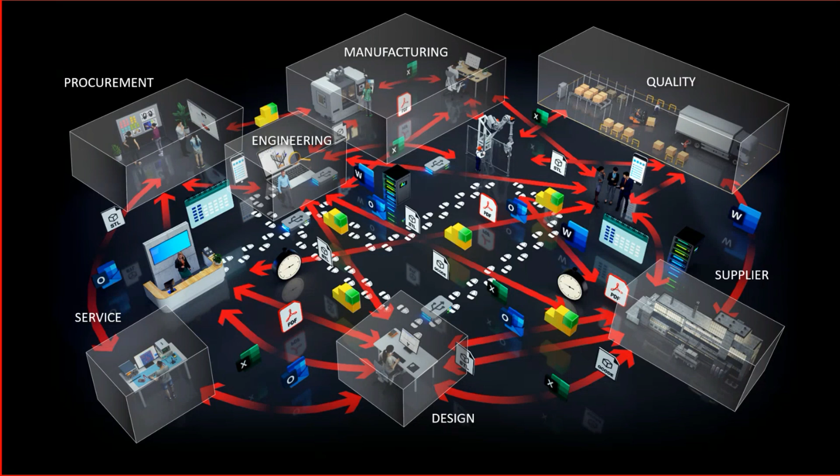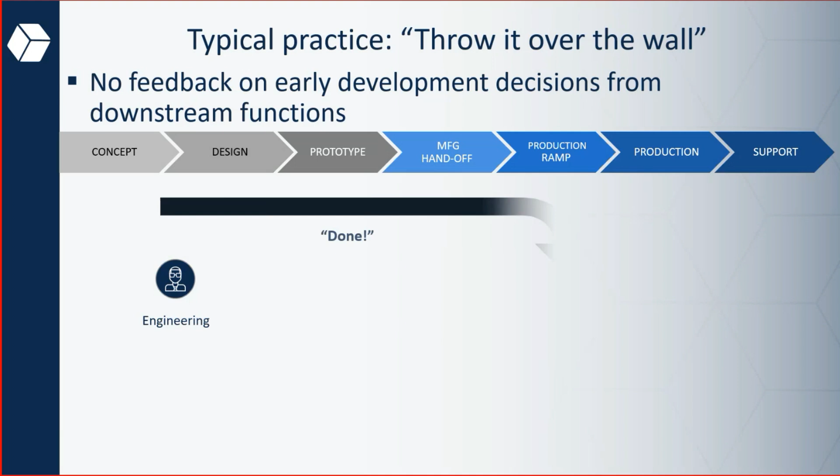Most of us will also resonate with the typical practice of throw it over the wall. We do what we need to do. A job comes into the in-tray, you do your job, throw it over the wall to the next person - not my problem anymore, right? That is one of the major reasons why a lot of inefficiencies take place.

So engineering does their job, throws it over the wall to supply chain, manufacturing, quality, and service. Then each one of them has to make a decision based on the information received from engineering. Now if there's no reverse flow of information from those 4 departments back to the design or engineering team, we don't understand from a design perspective what they need to do to mitigate potential issues.

And again, the information goes out, the work gets done, then they realize, oh wait, we've got a problem. They send the information back, and there's another delay to do the redesign. That becomes a very cyclic and, for want of a better word, annoying and irritating process, which leads to a high life cycle change cost.

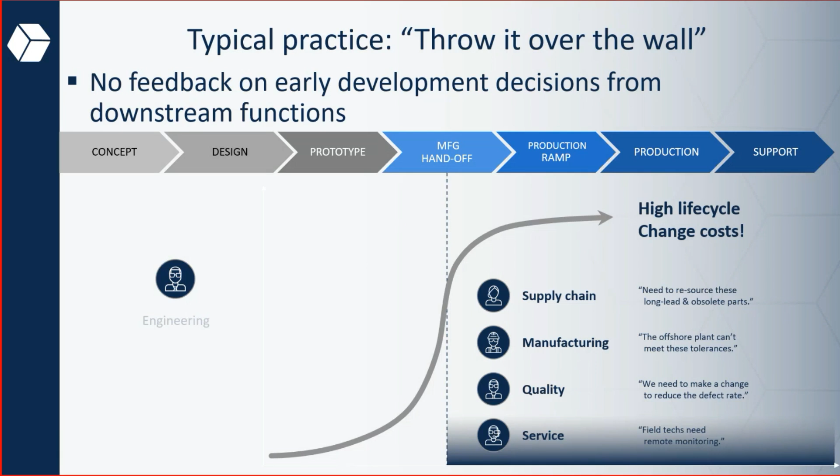But also, we spoke about missing your deadline - this is one of the areas. One of the reasons for that back and forth can also be one of the major reasons why deadlines are missed, and we all can resonate with that.

And all of this leads to more pressure than ever. The pace of the world is getting faster and faster as we go along. Other companies, competitors, are speeding up their process, improving their process, making it more worthwhile for themselves. Every day I speak to clients and colleagues, and you ask them how it's going, and it's always very busy, very busy. It feels like the last year never ended and we're just carrying on. I'm sure a lot of you online will also feel that way.

So meaning the pressure is on all the time. What are ways that we can do to relieve that pressure? Those are things we hope to solve today with you. So AJ, I believe you've got some polls set up for the guys.

Okay, yeah, so let's run a poll. The first poll - what are the problems that you guys are being affected by? Shall we have that poll launched? All right, so the polls are up. What aspect of what we've spoken about have you been struggling with? The collaboration and the siloed workflow, is that a problem? Change management, product configurations, or design and data management? I think we'll give it a minute, and then we can kick it off following that.

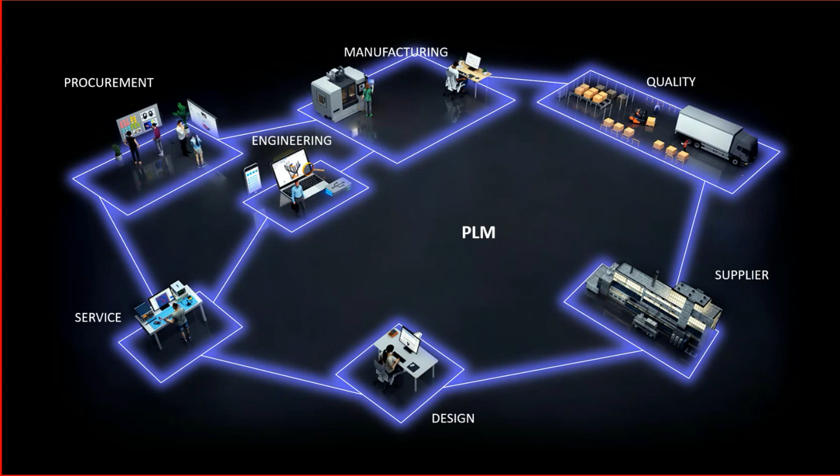So it's quite a nice little graphic that shows what PLM does in terms of integrating the different departments and stakeholders. Moving on, this is basically the opposite way of working from what we spoke about, throwing it over the wall. You've got an integrated system where all the different systems and all the different people can talk to each other.

Another thing is multiple aspects of the process can actually happen simultaneously if you have that constant communication in place. So let's talk about costing while design is happening, while R&D is happening, everything talks to each other. If you've got a design for a specific product, you've got design for cost and supply, manufacturing, quality and service, all happening at the same time, while the departments are constantly in communication with each other. Each person has their own task list, each person has their own information list, and then they have access to whatever information they need at their fingertips.

So basically no wall. Pretty much. Okay, all right, break down the wall, right? Yeah, move past the barrier. Yes. How do we do that? So how do we do that?

The first thing we're going to speak about quickly is Autodesk Vault, which is a PDM solution, a product data management solution Autodesk provides. We've been offering it for quite a long time, and it's something we are quite passionate about as well. Here's quickly just a brief video.

Engineering data is complex, but managing it shouldn't be.

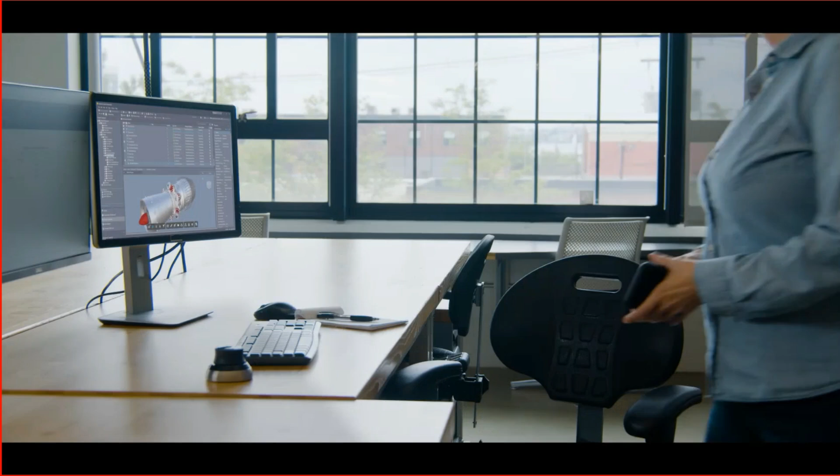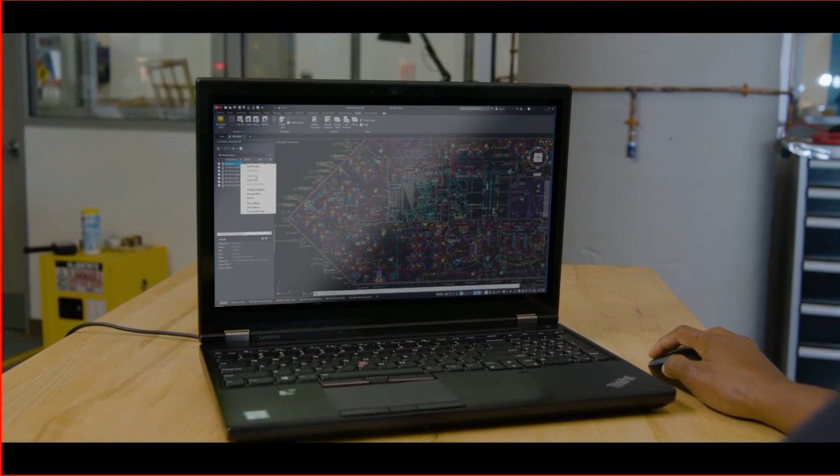It's time to get your data under control with Autodesk Vault. Vault is product data management that keeps everyone working from a central source of secure, organized data. It integrates with your Autodesk design tools and other CAD systems, so you can quickly find what you need and prevent rework. But it's more than CAD file management.

Vault ensures a consistent approach for data input, review, and release to manufacturing.

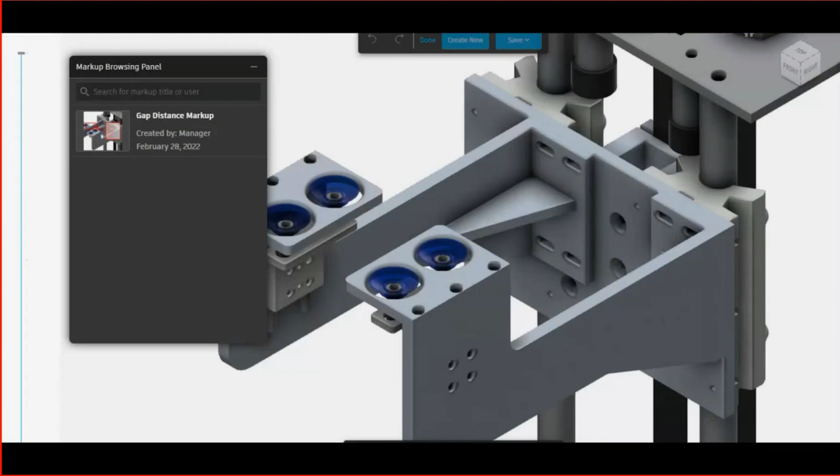Teams can access data instantly and work simultaneously without overwriting files. Vault brings together internal and external collaborators, including suppliers and customers. Share files while protecting IP. Review, markup, and track comments.

Vault manages the change orders and revisions for a complete history of ECOs. Vault also helps you create and maintain a comprehensive bill of materials, updated in real time as you work. From design to release to manufacturing, everyone works with the latest data.

No need for a VPN connection when working remote. Vault users stay productive anywhere they need to work, whether desktop or mobile. Easily add users to your subscription as you scale. And with our global network of Autodesk partners, there are local experts ready to help you get the most from Vault PDM.

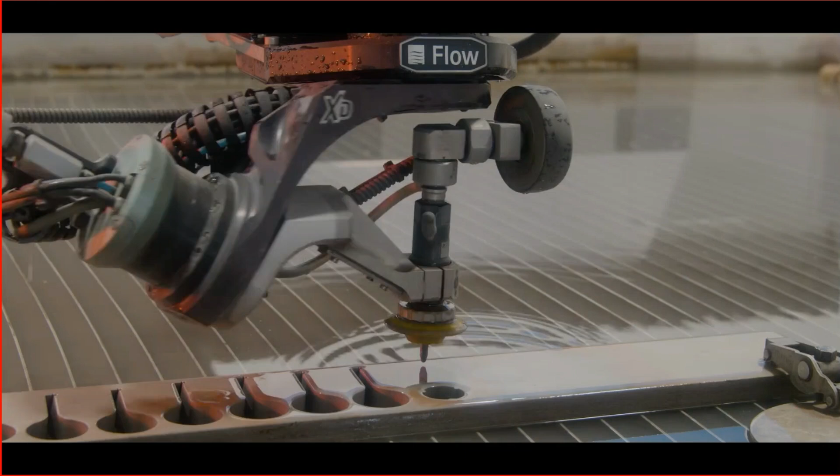Autodesk Vault transforms your whole design to manufacturing process, which helps you deliver better products faster and at a lower cost.

I hope that provided some insight as to an overview of what Vault does offer. Now, when it comes to Vault, it is a single PDM that manages all of your product data, and it does integrate quite seamlessly with Alias, AutoCAD, factory design utilities, Inventor, and so on. Additionally, it does integrate into your Office suite of products, as well as your PDF or Adobe tools, and external CAD users or CAD programs can make use of the Vault where necessary.

Vault does allow you to sort of integrate all of that data. You will be able to connect seamlessly, and we'll see it as we go along with the additional tools that Vault actually has.

In addition to that, quality improvement is something that, as Daniel has mentioned, everybody has to be passionate about. Quality is not something you do; it's something you live. It's a quote that stuck with me for quite a long time, ever since I've done the courses. That's something that if you want quality, you need to be quality. If you want output quality, it's not something that you can just go in and implement a Six Sigma statistic and expect the quality of your product to come out right.

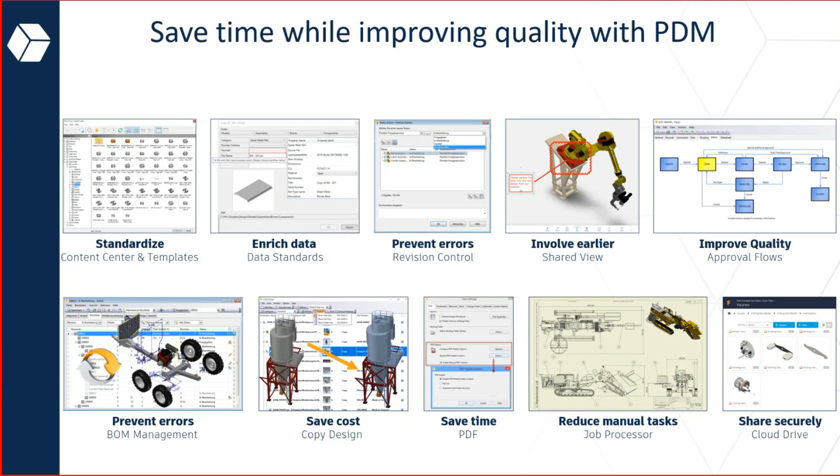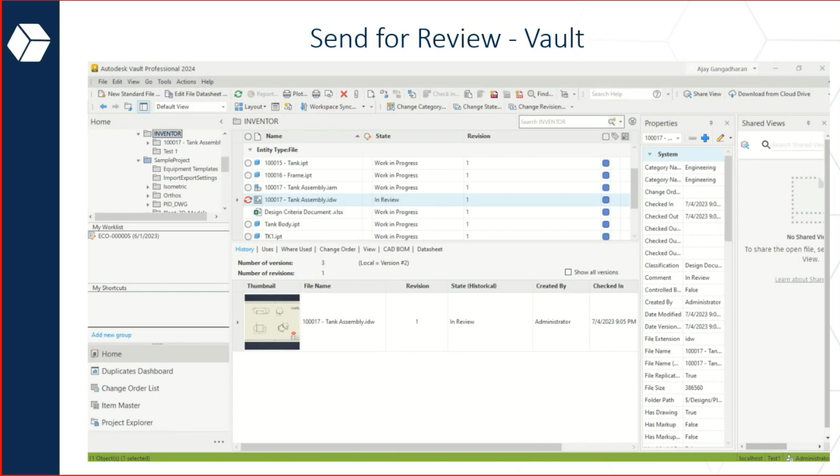And let's continue a little bit. There's just a short video showing us a quick definition on how we run a process flow from a design data perspective, where you can actually run it through the different states in your life cycle, and then each individual user has the functionality of whether they see the file or not, or what level of interaction they have allowed with that particular file. So if you've got a designer, they do design. If you've got a reviewer, they should not be able to modify the file. They should be reviewing it and sending the information back to design, for example. And that sort of thing is seamless and completely integrated into the Vault.

And that's known as the life cycle, right? Okay. And then from a BOM perspective, we're talking about engineering BOMs, manufacturing BOMs, and electrical BOMs as well, all of which Vault can be used to manage.

The engineering BOM reflects the manner in which the product is designed. How do you want to put it together? You need to actually design it that way. How do you want it to be manufactured? You need to design it that way. So all of that gets managed in the Vault, along with things like lubrication, paint, and similar items you wouldn't necessarily design but need to account for. How does it get itemized? Where does it go? These are questions the Vault would answer for you.

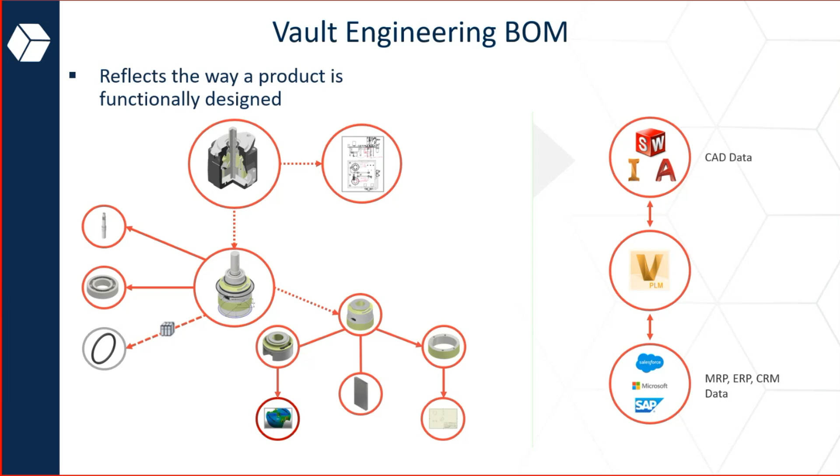We wouldn't want to be sitting and designing 20,000 screws. But also, we don't know how many liters of paint we may need, as an example. So between those quantity items or purchase items like paint and glue, you can create a dummy item inside the Vault that allows you to kick out the BOM as needed, because you don't want to be adding that to your assembly.

Quick video on the bill of materials concept. We're talking about release for manufacturing now, when the product or assembly gets released for manufacturing, we push it into that process and state. Speaking to the life cycle from earlier, once it's pushed into that state, everybody can pull a report or data from the vault, checking what items are available for manufacturing. This also speaks to the security of the data, meaning only if we tell the system that only manufacturers can see released data or PDFs from released data, that becomes an aspect of it, and this automation takes place.

We need to run something called the job processor in the Vault in order for all of those automated processes to actually push forward. This is just a demonstration of that particular job processor. It does happen automatically.

Once all of those things are in place, the information is available to anyone who has access to the system, whether designers, the manufacturing team, or management. To a certain extent, you can almost create a workaround so the sales team also has access to the vault, so they can see what's available and what is in manufacturing.

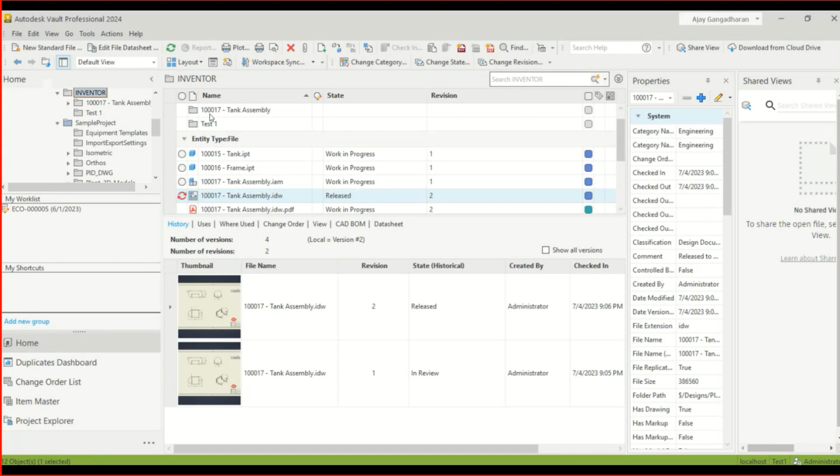You set up the automations within the transition so that when it's released, the job processor kicks in and automatically creates a PDF. There's no need to go and create the PDF manually, the system will do it for you. And then there's your generated PDF that was automated there.

Let's talk about the BOMs, the bills of materials. How does one create or export a bill of materials from Vault? This is a direct export where you create an item with your entire assembly. It grabs the data of all the components that are required, as well as the non-design components Daniel was speaking about, and that can easily and seamlessly be exported into a list of formats, like CSV, XML, and others.

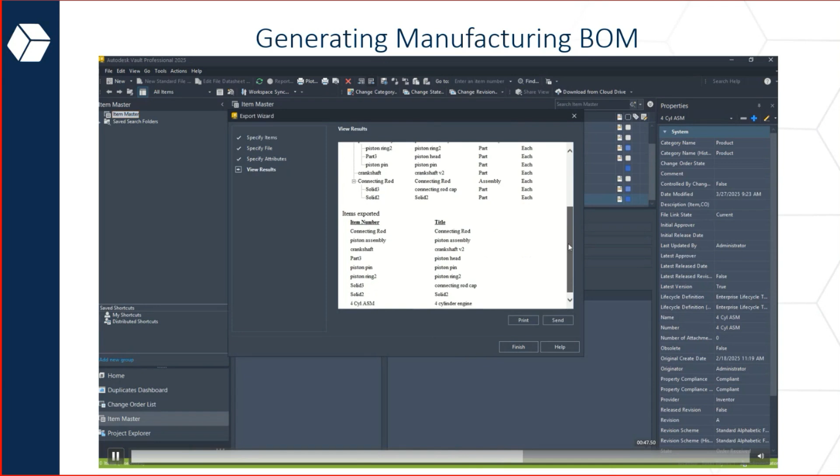Once that export takes place, we'll export that to a CSV file, and then that can be pushed forward into the rest of the process.

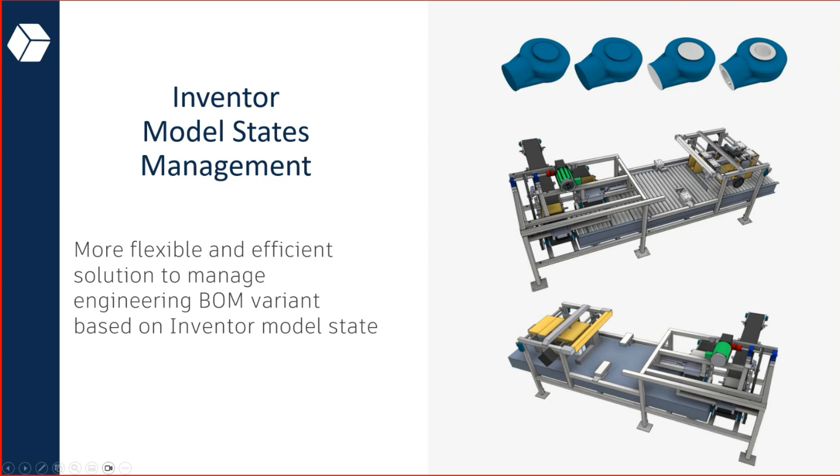Vault also allows you to manage your Inventor model states. What is an Inventor model state? It's different states in which a model, a 3D model or assembly, can be placed. For example, you can have a casted item and a milled item, or a pre-machine and final machine item. Those can be contained within the same Inventor part model, and Vault allows you to manage that as well.

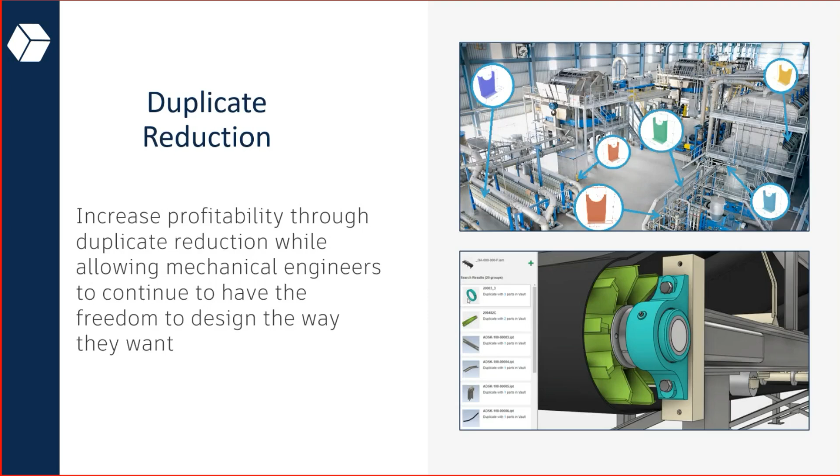Duplication reduction: there are functions in Vault that allow you to diminish or decrease the amount of reworking and redesigning the same thing, and it also stops you from creating duplicates of similar items. File naming is also a bit of a problem, in terms of if you have the same file name, like 'part one', it can be found a hundred times.

Then we've got a browser experience, the Vault Thin Client, which allows people with or without a license to access the Vault as long as they're connected within the same network. This is predominantly used in the workshop, so release drawings would go there, meaning the workshop would always be working off the latest files. There's no need to update printed drawings manually, though you do still need to update your PDFs.

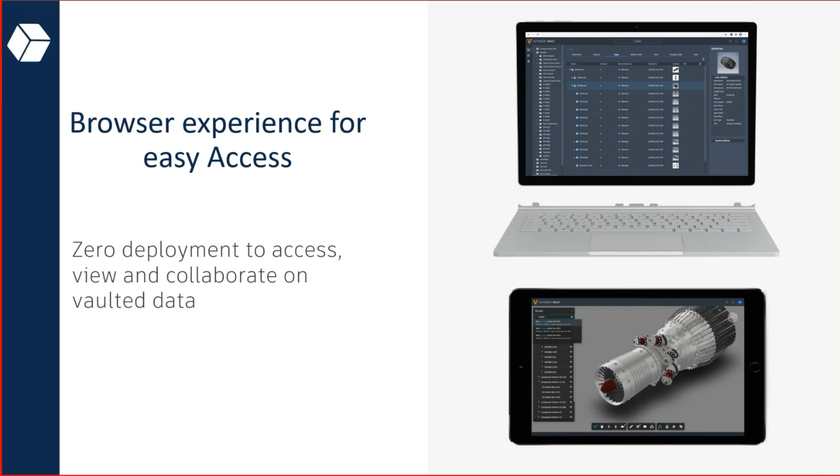And what about mobile? We've also got a Vault mobile app that connects to the Vault, very similar to the Thin Client. It has a bit of additional functionality that allows you to walk around on your phone and have a look at what you need to look at.

Now we're talking about the PLM system, or Autodesk Fusion Manage. Let's talk a little bit about that, and a quick video to run us through it.

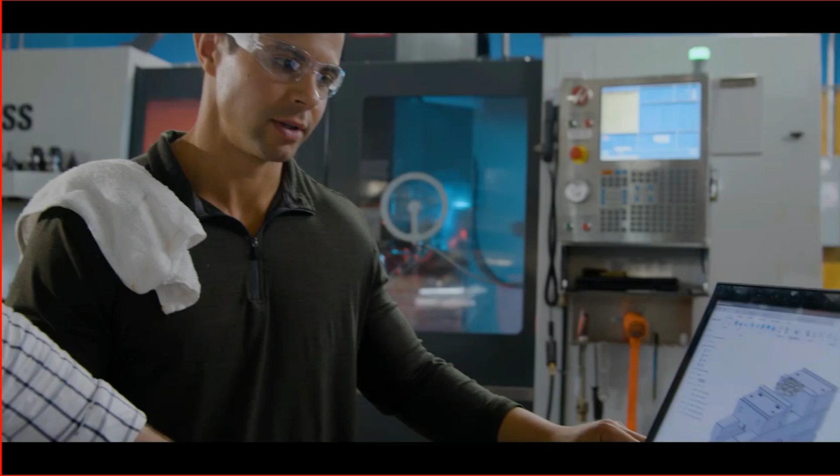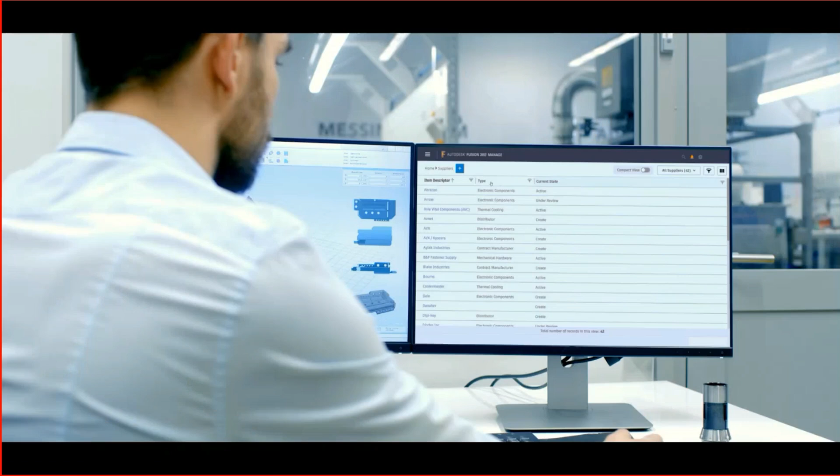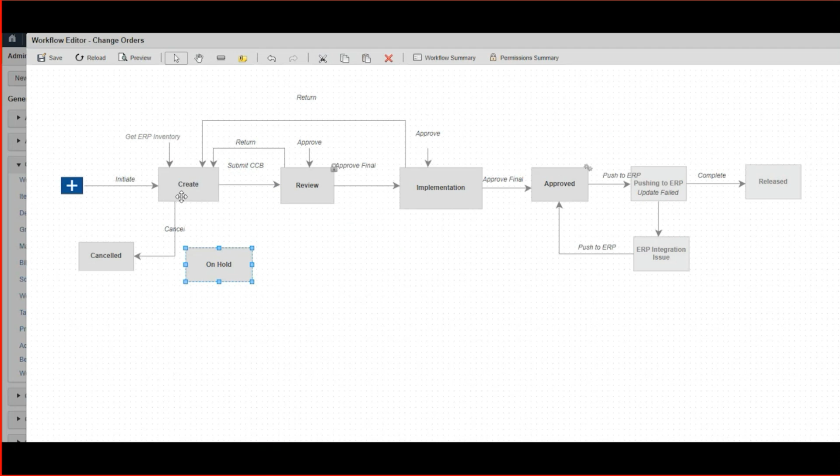In a world where you're always connected, shouldn't your product lifecycle management be too? Autodesk PLM brings you data and process management in the cloud, with instant on and anytime, anywhere access from a browser or mobile device. An intuitive user experience makes it easy for everyone to adopt. And with plugins for the most widely used CAD systems, teams can use Autodesk PLM with their design tools of choice, giving you faster collaboration across your organization and supply chain, regardless of who's using what. Autodesk PLM is a central source of truth, managing all your data and processes, and with its open API, it integrates easily with other business systems such as ERP and CRM, so you can do even more with your data. Autodesk PLM also helps you standardize business workflows. It comes with core PLM apps and dozens of specialized processes at no extra cost, and rather than starting from scratch, they have out-of-the-box workflows that you simply tailor to your business needs. A simple change of category here, another change here, and you're all set.

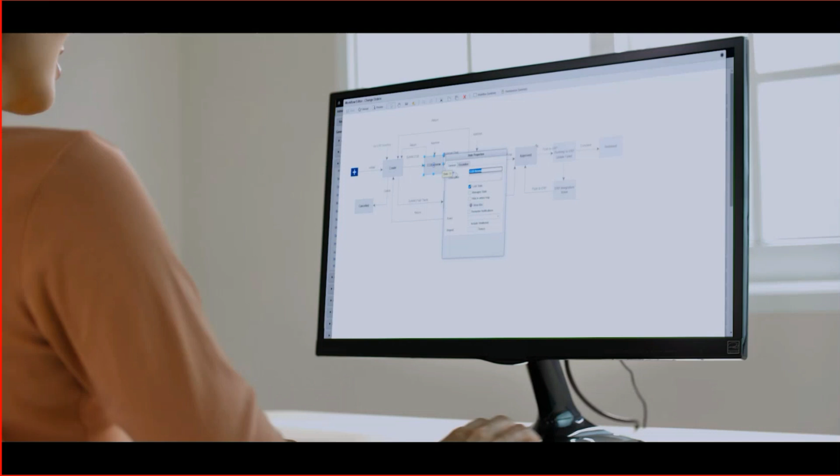Now you can better improve your new product development process, better manage change orders, bill of materials, supplier collaboration, and product quality. Start with one process at a time and easily expand as you need. We give you the flexibility to start today and grow tomorrow with PLM that scales with your business. Our convenient subscription model allows you to add users as you need, and they can access the complete set of PLM capabilities without hidden costs. And with our growing network of Autodesk partners around the globe, there are experts ready to help you get the most out of PLM. Realize the benefits of connected people, processes, and data, and spend more time reaching your business goals with Autodesk PLM.

Really cool, I think the open API part is very interesting. Yeah, very, very interesting what we can do. So let's briefly talk about different aspects of the PLM, from quality management through change management, all the way through to bill of materials and requirements management. So all of that is being connected.

And again, like we spoke about a little bit earlier, connecting all the teams together. I think this is just an introduction to it. You can expect to hear from us later on in the year with other webinars that go much deeper into it. Sure, yes, for sure.